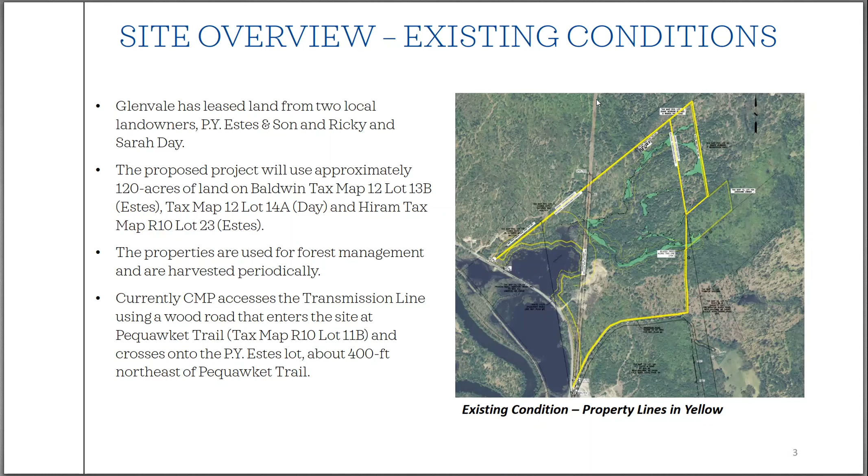As far as project size, the array will generate 21.5 megawatts direct current. That translates to about 16.2 megawatts of alternating current, the same that you would use in your power outlets at home. 51,000 solar modules will be employed to generate that electricity.

This is what they refer to as a fixed tilt array. So the panels run from east to west and they are static, they don't move. The tilt applied to those panels will be 30 degrees. The rows will be spaced about 16 feet apart.

They'll be SMA branded 4.6 megawatt inverters, 4,600 kilowatt inverters on site. At each inverter location, which we'll see in a minute, there's a storage ready capacity that can have battery backup or battery storage of power located at those spots.

As far as generation, there'll be just under 30,000 megawatt hours generated in the first year, and that's equivalent to about 4,611 homes.

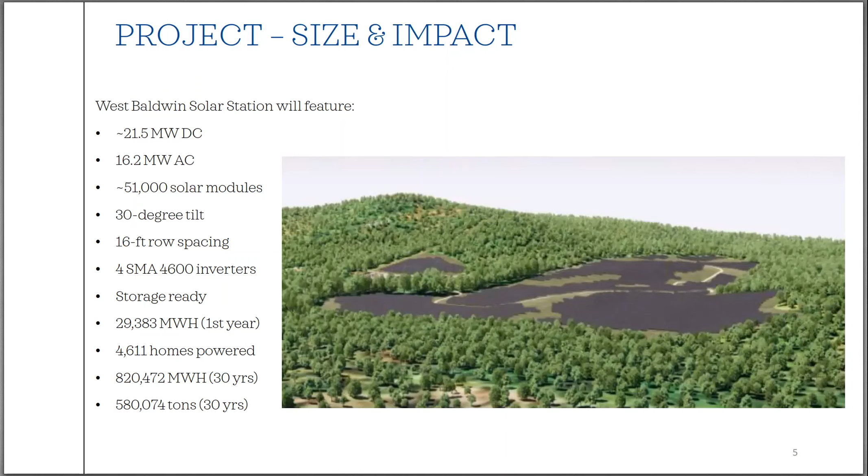So over a 30-year design life for the panels themselves, that's about 820,472 megawatt hours. And that is equivalent to 580,074 tons of carbon that will be eliminated by not burning fossil fuels to generate electricity.

Right now, Glenvale and West Baldwin Solar Station have been working with Solar Design Associates and SGC Engineering for the electrical design and the optimization of solar arrays. They've had their queue position and application in with ISO New England, and their system impact study is currently scheduled and in process.

Other considerations throughout the process were to minimize direct wetland impacts where we would be filling a wetland. There is clearing of trees in wetlands as part of this project, but direct impacts where we're either impounding a wetland or water body or impacting it and putting fill into it have been minimized quite substantially.

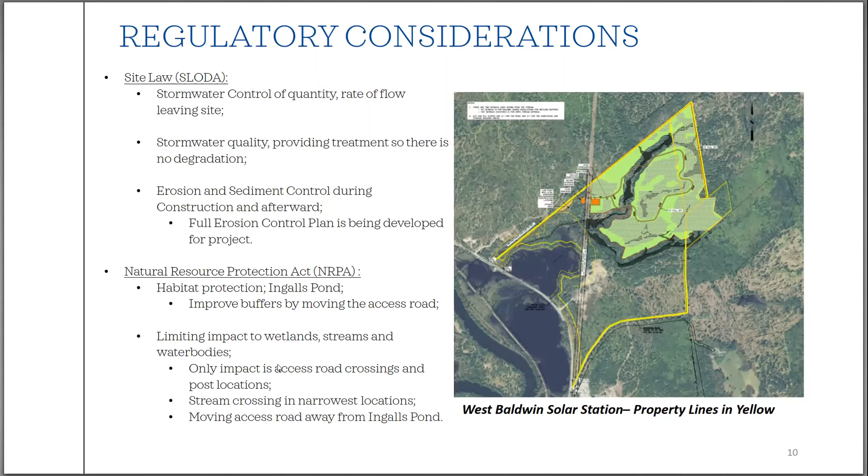This section 91 refers to the CMP transmission corridor, and this area here, which looks like it's a water body, is actually the PY Estes' gravel pit. This is the water body of Ingalls Pond, and you can see down here another little chunk of it.

So perspective one, from this location looking out over the site, you'll notice there's a fairly substantial area of trees that's going to remain between the road, the lake, and the array. Those trees do climb a fair amount up the hill, and most are fairly mature, between 60 and 70 feet tall, as we saw on the site walk.

So of the renderings, we have rendering 1, 2, 3, and 4, all looking out towards the array over Ingalls Pond. As you can see, due to the trees that are going to remain and some of the climb ahead of the array, the array won't be visible. You can kind of see in this portion of the rendering the clearing for some of that CMP easement as it runs out over the back of Ingalls Pond.

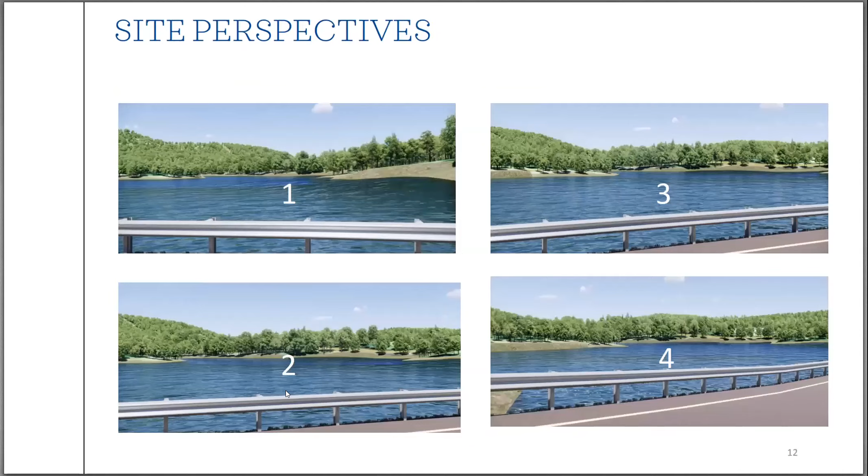So other than that, I will actually change documents if you want to get a better look at the layout and everything. But first, I think what I'd like to do is discuss the Google Street View image and that perspective vantage point, and then go through the rest and maybe take some questions.

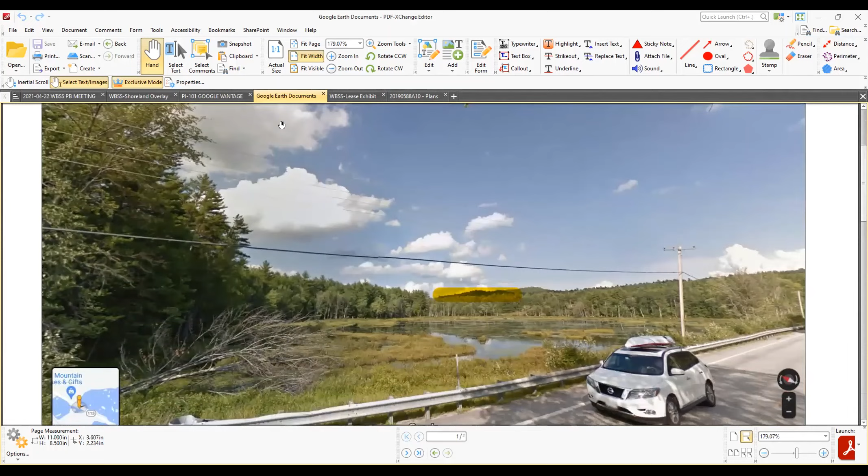So this is the image that Mr. Strzok had some questions about. This guardrail is at the end, almost on the Hiram border of the property. As you can see, this vantage is actually looking back almost east-southeast along Route 113. What Mr. Strzok had asked is if this hill was on the property and potentially one of the ones that the array was climbing up, and if so, how can we be assured -- as you can see, there's kind of a lighter run of trees in front of the darker hill in the background -- if the array was on that darker section, how do these trees down here block it?

Well, that's not the hill, because again, looking at the guardrail, which is along the road, and the power lines, you can look at this map here. I'm going to put this in full screen view so it's a little easier to see the whole thing. What you can see is the guardrail is right here that we were talking about, the end of it. And this would be the new entry into the site.

If you look back along the road -- actually I have a sneaking suspicion that street view angle is more this way -- but just saying, if you go due east looking towards that hilled area, you're not even looking at the site. To really get a good view of the site, you'd have to be over here near one of the utility poles on Route 113 and look this way. And at that point, even a tall person with an eye level of about 5'6" would have to be looking over the tops of 60, 70-foot trees that are climbing up the hill here, and you're going to be forced to look over the array, which is behind those trees, and you're not going to see it from the street.

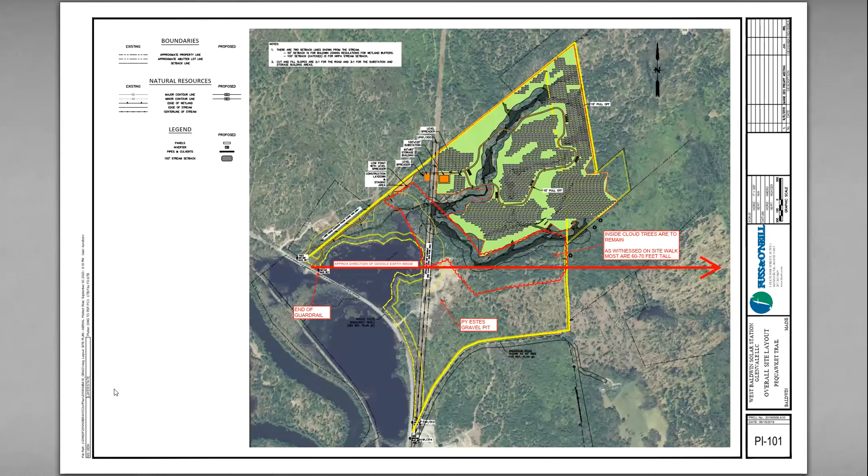So I'm pretty confident that the renderings are accurate. And I am happy that Mr. Strzok asked the question, because that street view is kind of indicating that there's a hill over there, but that's not on the property. You can kind of tell that it's on the other end of the pond and actually on another property.

So with that, I think what I'll do is stop talking and take questions. I do have the full plan set available, as well as some other maps and things, but I think it's probably best that I just take questions and get this started.

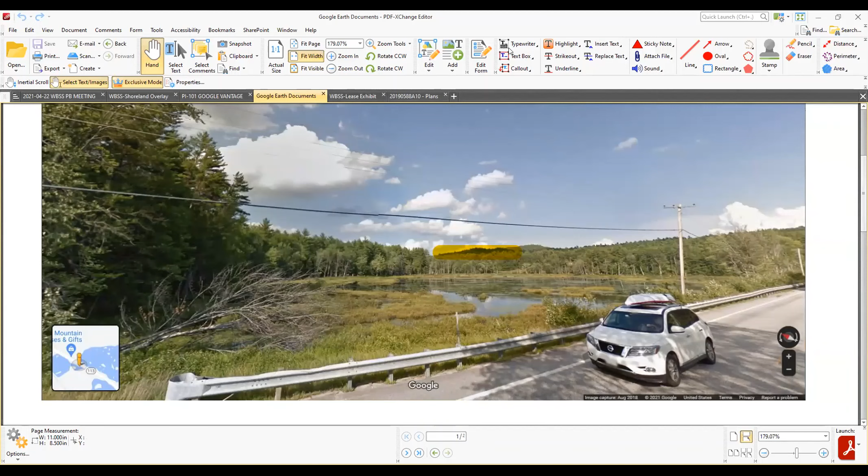Okay. All right. Thank you, Rick. Very informative.

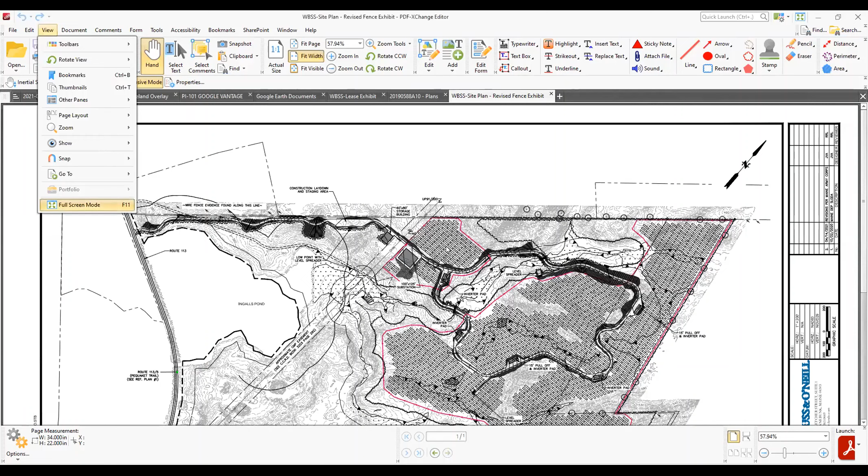No, that's fine. I'll share it and show you the map that I intended to do at the tail end of my presentation, sorry about that. So this is a little bit harder to read, folks, and I apologize - it's a black and white topographic map, but what you'll see in color, in these reddish magenta lines, is the fence perimeters.

So coming in again from Route 113, there won't be a gate until you get to the east side of the power transmission corridor. Then there'll be a perimeter fence that goes around that has a gate first to let you in. The substation will be gated as well, and then it'll circumscribe the infrastructure constructed here in this smaller area. We'll have a gate here to continue on the access road, and a gate here to continue on the access road, but that'll be a self-contained little area there.

And then the larger portion of the array will have a fence around it as well, but with a gate and yet another gate on either end of the road. There'll be some gates scattered along the back edge too for egress if someone's out there and needs help, like a workman or something.

So what you will see is that in response to Mr. Jarrett and Francis Small Heritage Trust's concerns, we left basically the entire stream buffer and then some, beyond the infrastructure of this inverter setup, turnaround, and stream crossing. We've widened out and eliminated the fence, adding a piece of fence here and here instead of going all the way around and making a giant blocked area. So now any larger woodland animals - deer, moose, and what have you - can travel back and forth along that stream corridor like they would today, relatively unimpeded.

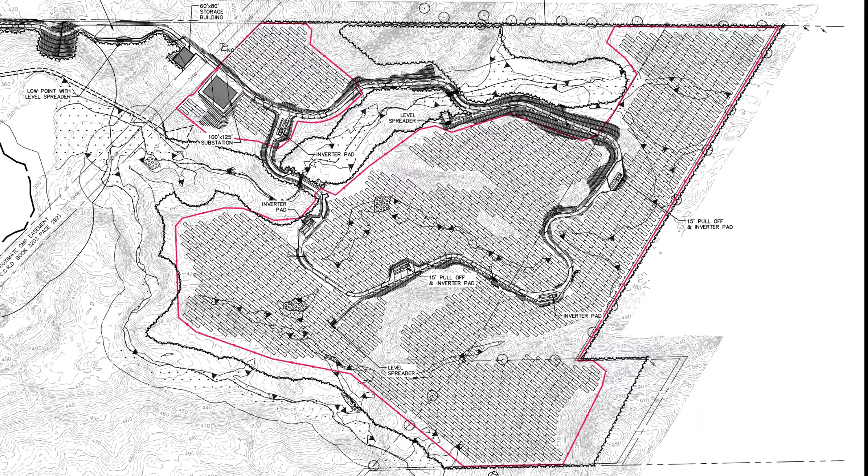Okay, we're going to follow the rule here, like I used to do in strategic planning during my career. We always said silence is concurrence. So if nobody's speaking up, we'll move on, and we'll certainly at the end of the process have the opportunity to address any other thoughts and questions when we work on the conditions for the CUP.

Good. Okay. Are there any other comments or questions or concerns from the public as part of the public hearing?

Okay, hearing none, I want to ask my mentors here, David and Joe, is it appropriate now to close the public hearing and open up the normally scheduled session of the planning board? There you go. Okay, we're getting a thumbs up.

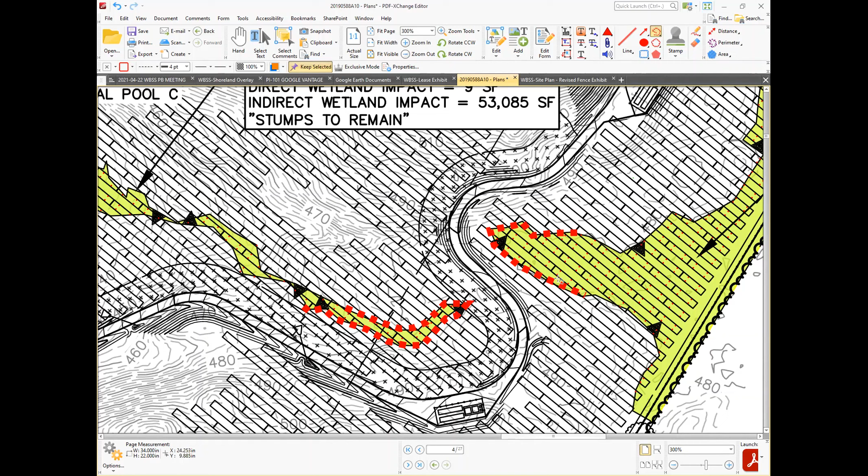And then we ran down a bank here and then around the corner, but they aren't connected. This one runs off this way, and this is actually running this way further into Hiram and eventually winds its way back.

I actually like the fact that the wetlands will be shaded. I believe that it's beneficial to keep the temperature of the water down and not cook the animals in it, which might happen if they're exposed to the sun all the time.

I'm happier with the panels in the wetlands.

Maybe our wetland scientist can confirm that or talk more on that subject, the effect. Feel free, Bill. I'll Vanna White the presentation for you, you tell me where you want me to go on the plan and I'll do it. I think you're right in the right area there, Rick.

These wetlands are not, especially in this portion of the property, there's not much that is unique about these. These are forested wetlands that in some cases, especially in these narrower wetland channels, if it hadn't been for sort of outdated logging practices, they might not be wetlands at all.

A lot of these skinnier, more linear wetland bodies that I was identifying were the result of skidder ruts that never got fixed when the loggers were on their way out of the woods. So this sort of isn't functioning as great habitat now because of the level of disturbance that is in the area of some of these things.

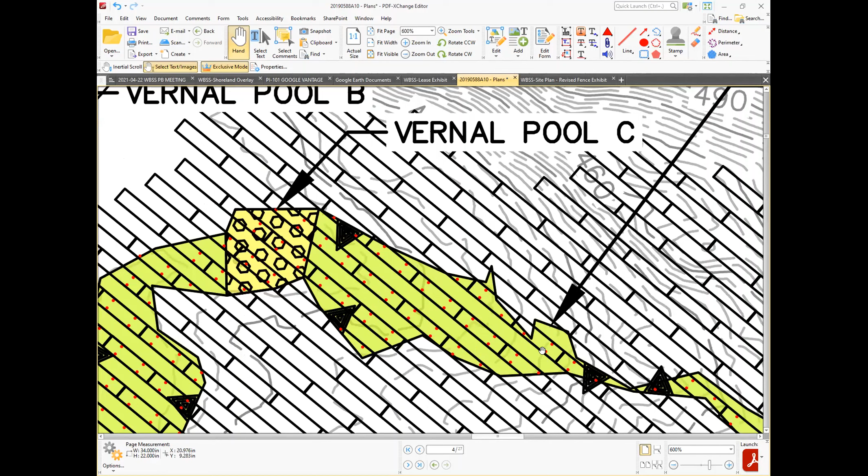Let me zoom in on this area, for instance, on this plan. You see these little red dots? Those are the posts occurring in the wetlands. So they're having us tally up all that impact and assessing the fee for those, but not the clearing. Remember, Maine is a pretty big timber state, and there's a lot of land that gets cleared all the time, either selectively or through timber harvest, not really much pulp anymore. When they're harvesting, they can sometimes clear cut right through here and the state wouldn't have a problem with that. It's really the direct impact, which we've called out in red, that traditionally gets the fee.

To muddy the water a little, the Army Corps does have the ability to get involved and assess a fee, but they use the state fee mechanism. It's very convoluted, to say the least, and frustrating. But far and away, they're generally just assessing impact fees in lieu on impacts that total more than, I believe, 15,000 square feet. So we're not even remotely close on the direct impact, even when you tally up all the little 4-inch posts.

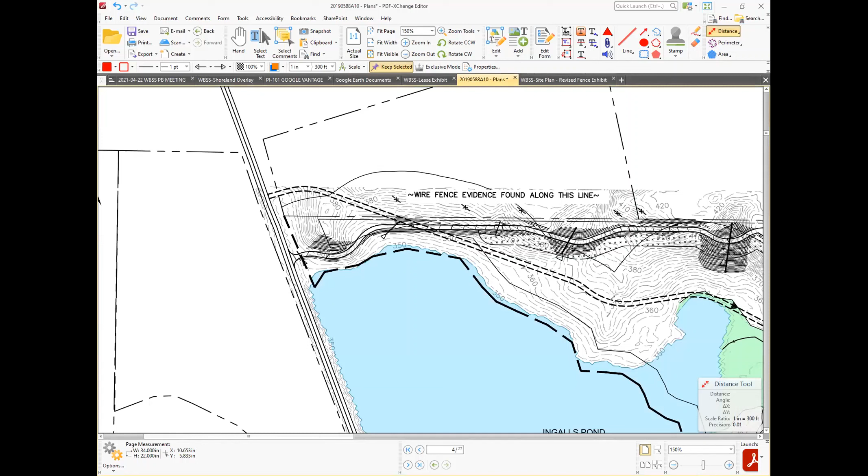So what we've got, I'm still stuck on a dimension here. Hang on. So as you go around, we have either sheeting flow if the road, it's a narrow road, 16 feet wide, so it's just going one way, pitched in a lot of cases. And in that case, that'll just be a stabilized grass embankment. That looks like it's about 6 feet of fill there.

Is each line a 1 foot contour? I think so. Yeah, and that's 6 feet of fill there. So that's quite a bit - you're moving a lot of dirt.

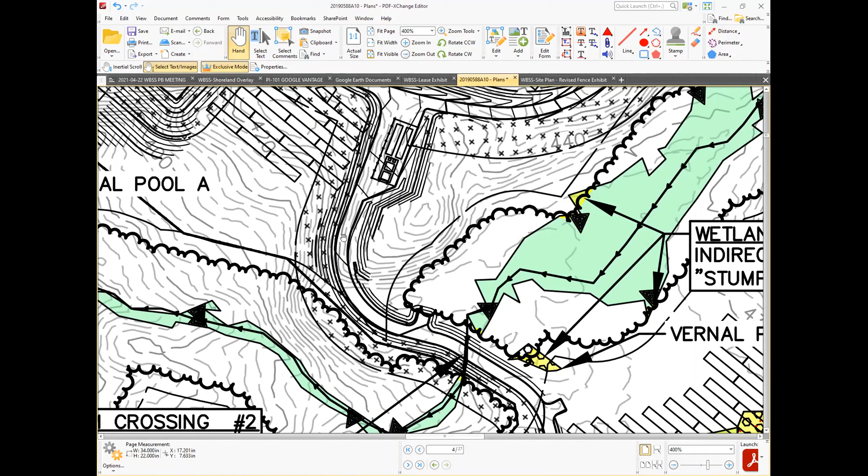And how do you keep that from getting back down into the streams? This is not the erosion control plan, but along the buffer, we are required to put a double row of either erosion control mix berm - I wouldn't foresee using a silt sock in this type of environment, but either an erosion control mix berm made from stump grindings, 2 of those parallel to one another around the resource, or 2 rows of silt fence is required by the DEP.

And there's a stormwater pollution prevention plan, the state of Maine version, which they're delegated the authority to oversee the EPA stormwater program in Maine. They call that the stormwater pollution prevention plan, or erosion and sedimentation control plan, and the folks on site are required to keep that up to date and fill out logs for the erosion control, make sure they're logging any repairs that have to be made to that perimeter, and keeping up with it and mitigating any erosion they run into.

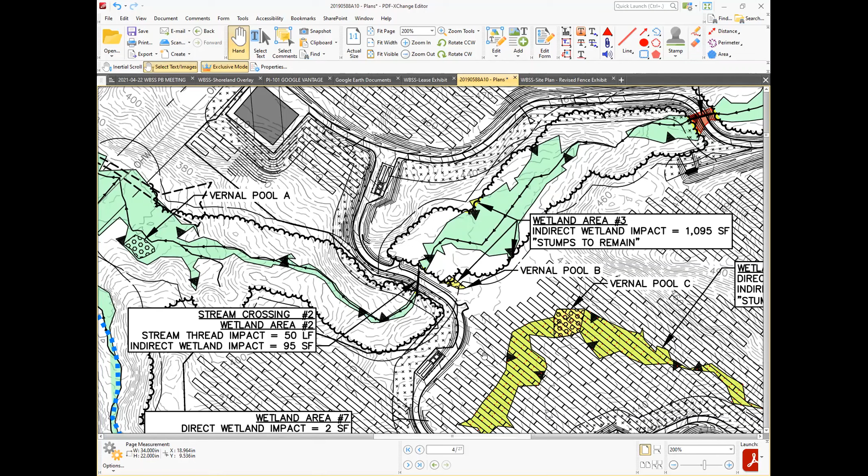You'll also see that we do have ditches. In the case of this area, it's a bit of a hill coming down towards the road, so we've put a ditch in line on the inside. Every so often there'll be either a culvert pull-off, or in this case, what they call a ditch turnout to a treatment buffer. This will go out over a level spreader, a stone lip level spreader, and out through the buffer to the wetland and be left to treat that way.

Over here on the other side of the road, you have a cut - no, on this side of the road we have a fill. And that side looks like a cut. This side's a cut, a slight cut - really just a shaving. We positioned the road so it would mostly be along the edge, but in this case, it's a bit of a cut because we were trying to hold it back from the wetland.

Yeah, I see it. So over here, what you'll notice is that we have spaced pull-out culverts every so often on the ditch, because you know how it gets, especially with any kind of hill, which this is. We didn't want a long run of a swale, so these bypass culverts that go out into the meadow underneath the panels are spaced such that I think they're only about 250 feet apart, to minimize racing water down that ditch. And again, this last one here has a ditch turnout to a level lip spreader, and then we'll have a protected meadow buffer underneath the array.

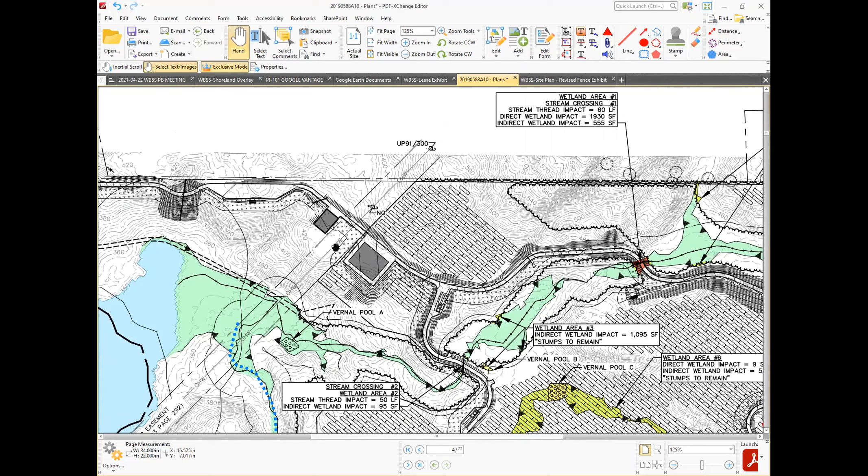Yeah, and I know I'm not looking at the soil erosion plan, but I'm just talking in general - there's a lot of earth moving here, a lot of disturbance to the site. You're changing basically the runoff characteristics from forest to meadow, thinking about increase of runoff, you know.

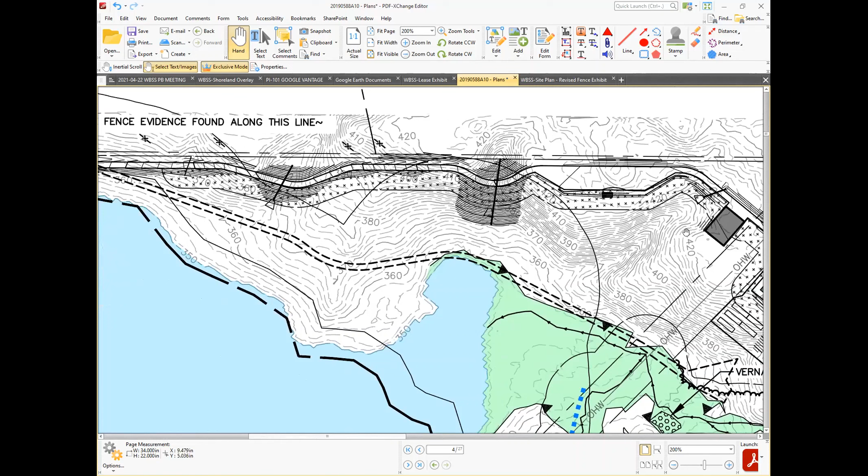Yep, no, we've run a full stormwater model, and again, what you'll notice here too is the state requires some form of stormwater treatment. You see these areas with the little cross, the plus sign hatching - those are all required to be maintained as what they refer to as a buffer, and there's a certain quantity of those that we need to provide along the impervious surface of the road in order to maintain the treatment characteristics that the state's looking for under their regulation.

Right, I was more concerned with impact to Ingalls Pond, you know, and how we're dealing with that.

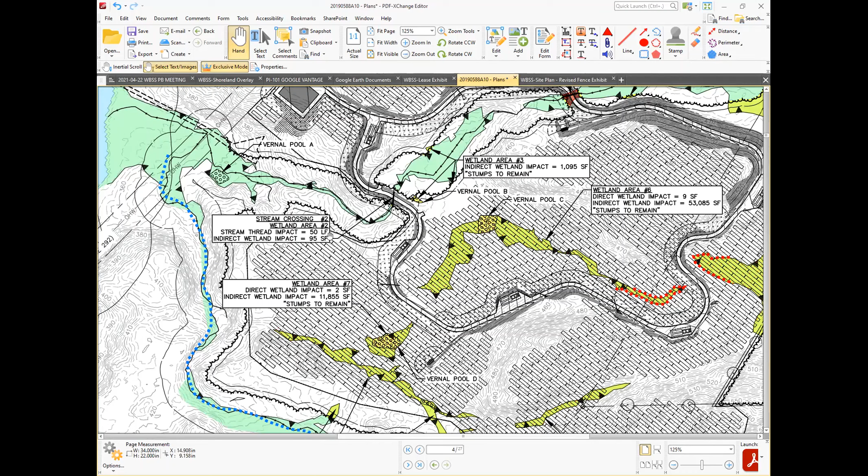The other thing to understand is that the state does have a disturbance-at-one-time threshold that you can't exceed. So as we go along and build, it's not like they're going to blow open all 100 and some odd acres at once. It comes in chunks, and you have to establish the prior piece before you move down the line.

So they may do some of the foresting all at once, but when it comes to the road construction and moving in and doing the rest, they have to proceed in a manner that's phased out and staged. On your soil erosion plan, you must have a sequence of construction outlined.

There's a set of notes in the back that the DEP requires on all projects that discusses how much can be open at once. Generally, the erosion and sedimentation control plan allows for that sequence to be modified, but they have a threshold of acres at one time. It can be modified by the contractor if what we've come up with in our plan isn't how they'd proceed, but they have to maintain the same threshold.

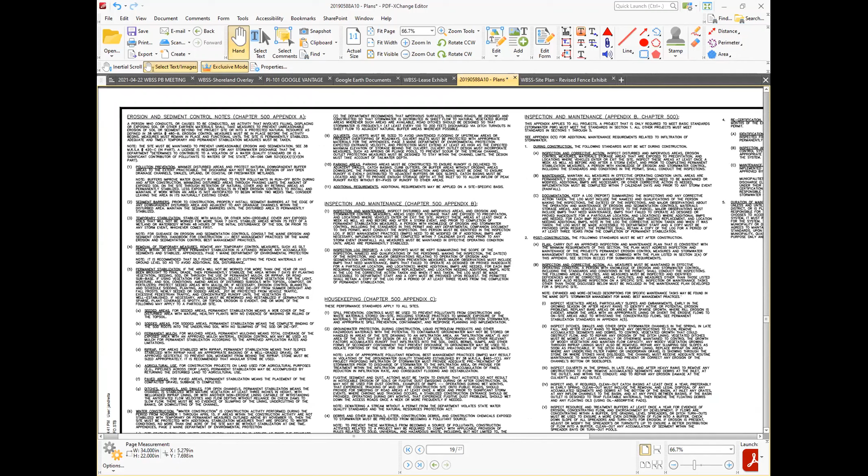I'm trying to find it. Of course, it's one of those things you can't find when you want it because the notes are so thick. Well, I'm pretty much familiar with this sheet, it's pretty much standard. So yeah, I'm glad it's there. I'm just, you know, as I said, I don't see the whole set, so I'm asking.

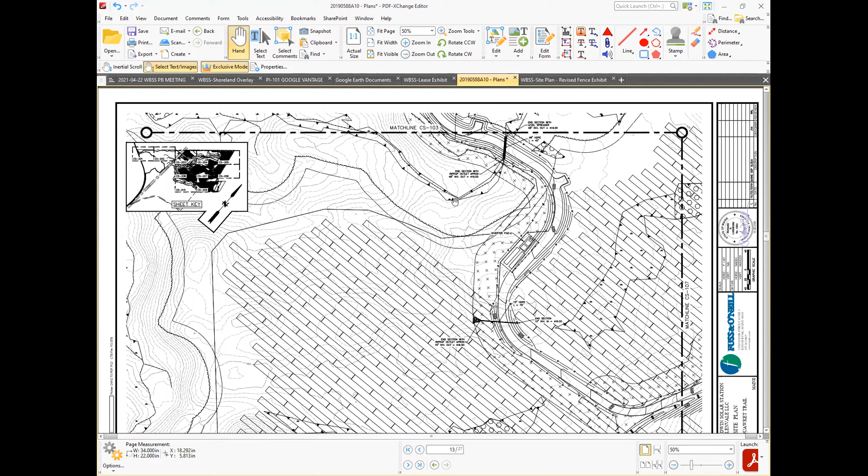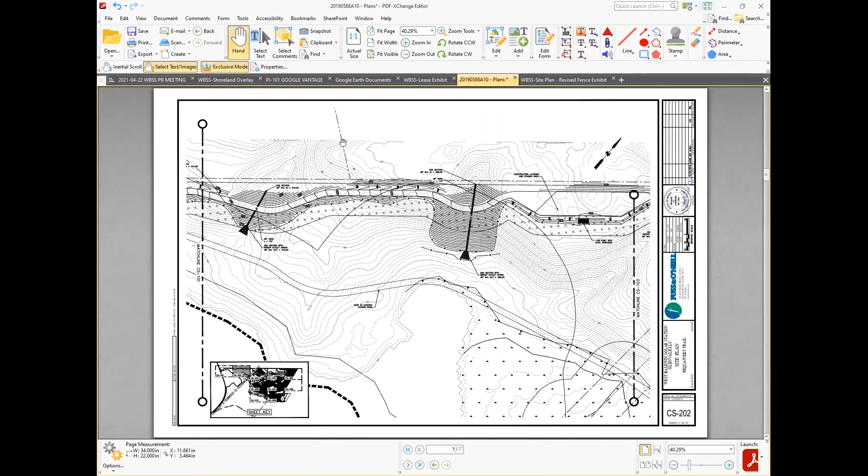So the contractor can, within the confines of the restrictions of the open area thresholds, move that around based on how they feel it would best be constructed. I understand it's confusing, but I know in New Hampshire they limit it to 5 acres, and on a project like this, where it's this big, it would be limited to 10. I'm drawing a blank on whether in Maine it's 10 acres or 5.

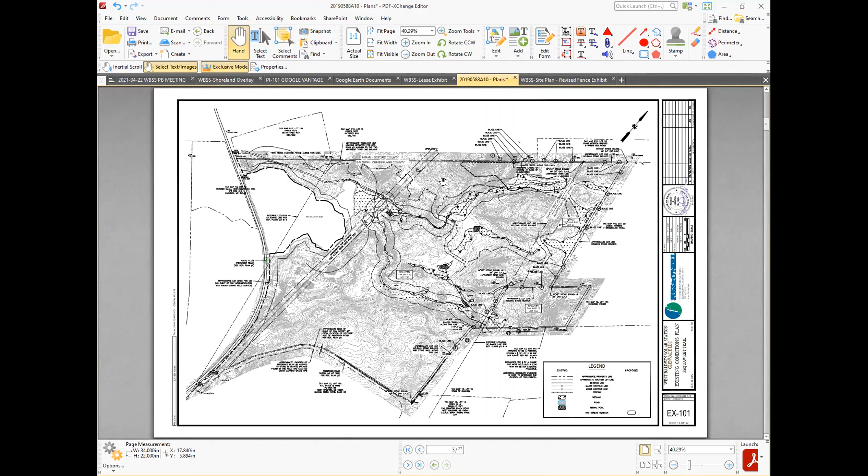So I apologize. Okay, thank you Don, that was great, great ideas. If you want to see any more detail on the soil erosion plan or sequencing plan to get more comfortable with the impact to Ingalls Pond, I know Rick and Aidan will be able to get you that detail. Do we have a set in-house I can look at? Yeah, I think so, and I can certainly send the same file share to you, Don.

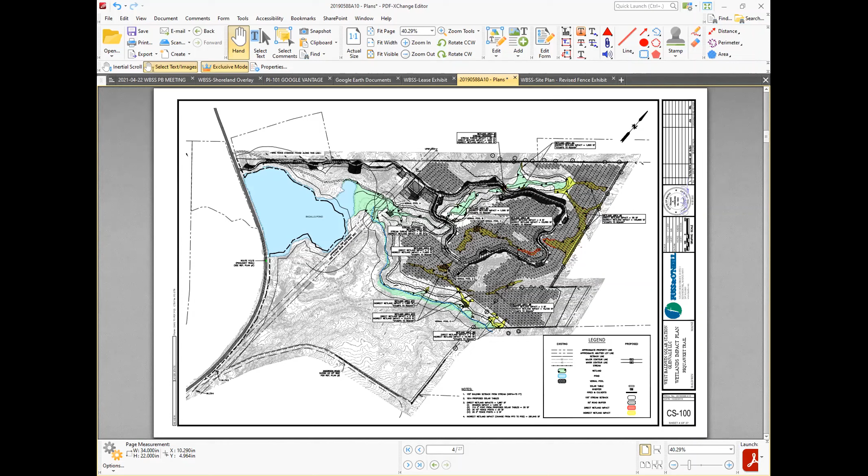That would be great. Mr. Chair? Okay, yes. Yes Aidan, go ahead. Because this is our first time to meet Mr. Sharp, I'd just like Rick to spend a moment talking about how we're moving the road away from Ingalls Pond. Given that was Mr. Sharp's concern, I think we're doing something really helpful for the pond, so if Rick could spend a minute on that, I think it would be helpful.

Absolutely. So right now, Don, this is Route 113 here, going past Ingalls Pond, the eastern portion. There's another big section over here after some island area in some spots. But the portion we have is on the east side. Today, this double dotted line is where the access road to this property is - it actually starts in Hiram. The landowner was a bit chagrined by that, but that's where it starts and comes in. As you can see, it runs pretty much right along Ingalls Pond, if not in it, depending where you're at, and gets pretty punky in spots as you walk in. As you remember from the site walk, there were a few spots where it had actually washed out - I think one might be right here, and another might have been right here.

What we recognize is that this is not acceptable to have a construction or access road for a large tract of land being forested. Even if this project wasn't being done, this would still be no good, even if they were logging it all the time - it's just way too close to the resource. So as part of the project, since this isn't even technically on the property, we're moving the entrance over here. That is in the area already being impacted by Route 113, then promptly moving it up as close to the property line as we can, continuing to climb the topography there. That will allow this road to not be traveled anymore, not be an issue, and revert back to woodland essentially. Yeah, I can see that - I like what you did there.

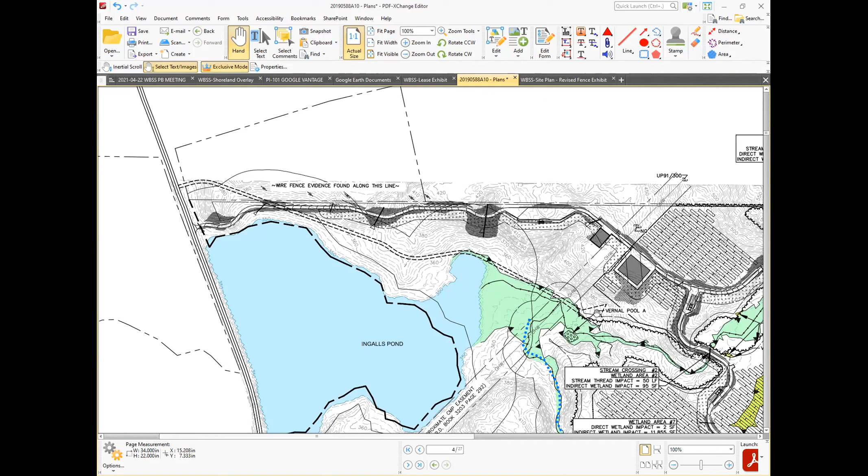You're creating a much better buffer between the roads and the pond by putting it up on the hill. Yeah, you have several hundred feet of forest that you have to filter through. It'll be a nice improvement. That will allow for some of this area to be a less disturbed habitat, and this most definitely right here. Yeah, that is an improvement, that's for sure.

Yeah, when we ran the site walk, it's a little surprising, especially as you get down and start to head towards the log landing, or what have you, on the other side of the power lines, just how close you are. You're pretty much walking right along the edge of that wetland. Right. Okay, good. Right.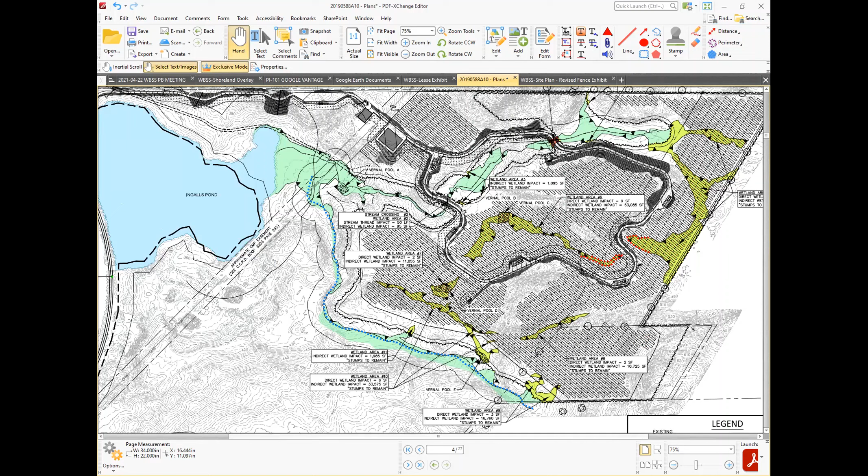So are there any other topics that board members would like to bring up? David, I thought you had your hand raised earlier. I think Wes was the next one. I think he had his hand raised earlier. Wes, take your, there you go.

And I'm sure all the sites there will be like that. I did the detail of erosion control on the Long Road project, and they even mentioned that if land is disturbed in construction, it should be seeded within a week. So they take a lot of care on it, so I feel comfortable about that. And the biggest disturbance of land is digging trenches for electrical conduit, but that's in isolated areas, and I'm sure it'll be controlled. So that's my two cents worth. Thank you.

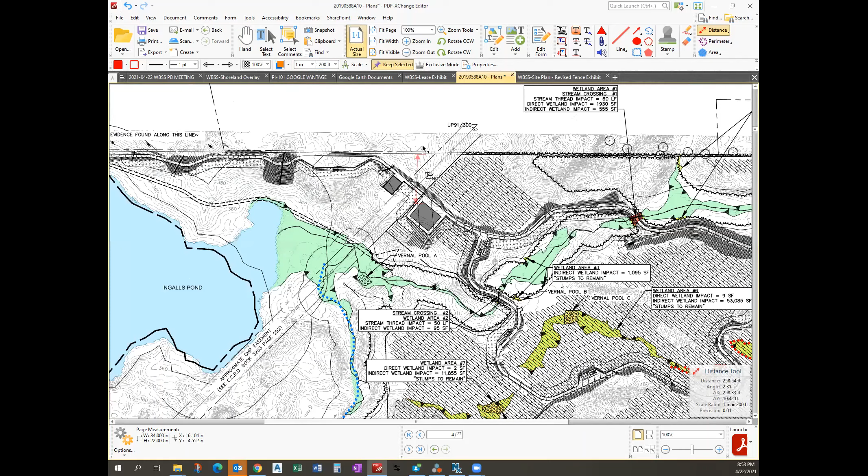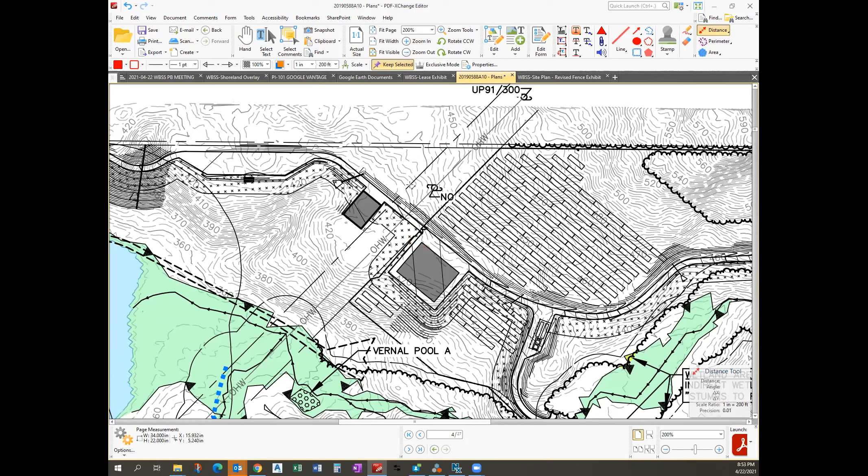I think. Yes, 200. So the substation, the nearest corner of the substation is going to be just over 270 feet to the property line. And that is, there's not really any other home or anybody over there. I think that's a large wood lot.

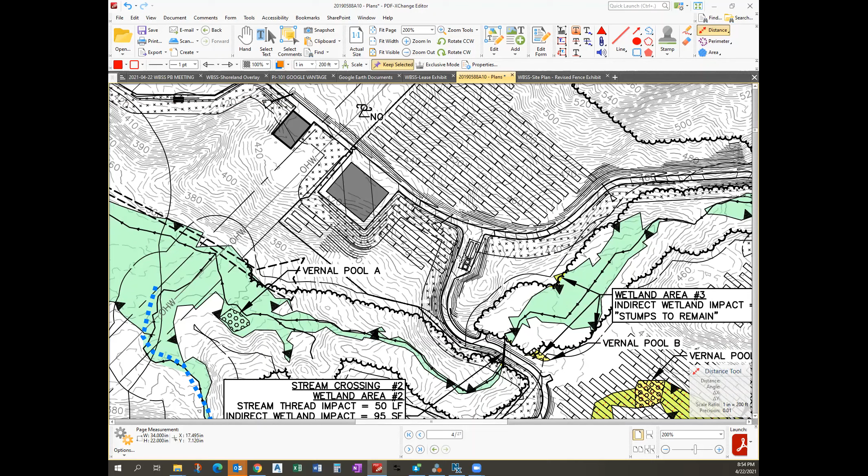And then the substation itself, that equipment doesn't actually make any noise. The pieces that do would be located on one of these inverter setups, and they make the equivalent of a refrigerator hum when they operate. And those are more inbound the property and project. Here, and here. And there's nobody around those.

It's all wooded lots as far as you can see around here. So as far as noise goes, there's not really any real impact there. I mean, if you were standing right there and it was humming, you would hear it, but it wouldn't be much louder than when your refrigerator kicks on to do a cooling cycle.

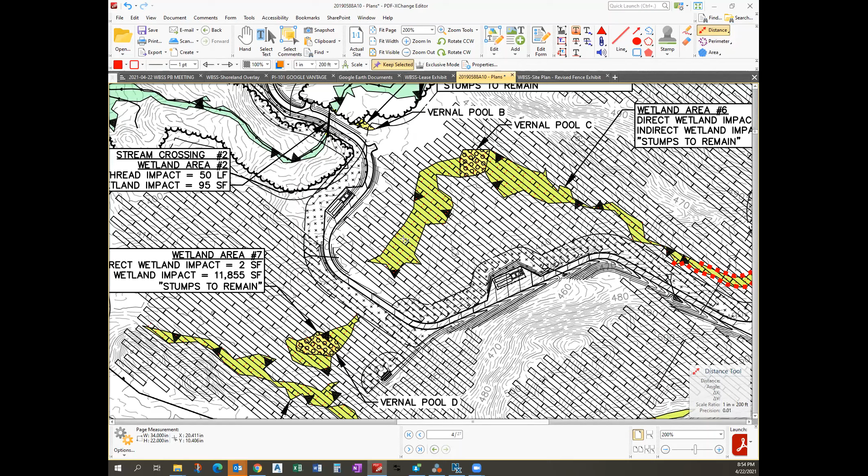As far as the bigger question, the groundwater, again, we're leaving the surface of the ground, except for the road areas, open to continue to do what they do now today when it rains. So the runoff from the panels will be clean.

There's no strange coatings or anything on the exterior of these panels. I know in the past there's been things that they would potentially treat them with, but these are all pretty standard solar panels, just like you'd have on a roof of a house for treatment. So it's not any different than that.

So there's not really a risk there of anything impacting the groundwater on this site. It's very akin to it falling through the forest that was there before the panel. It's going to hit the panel, roll off, go onto the meadow below, and then either soak in or in a really heavy rain start to run off a little bit and then soak in.

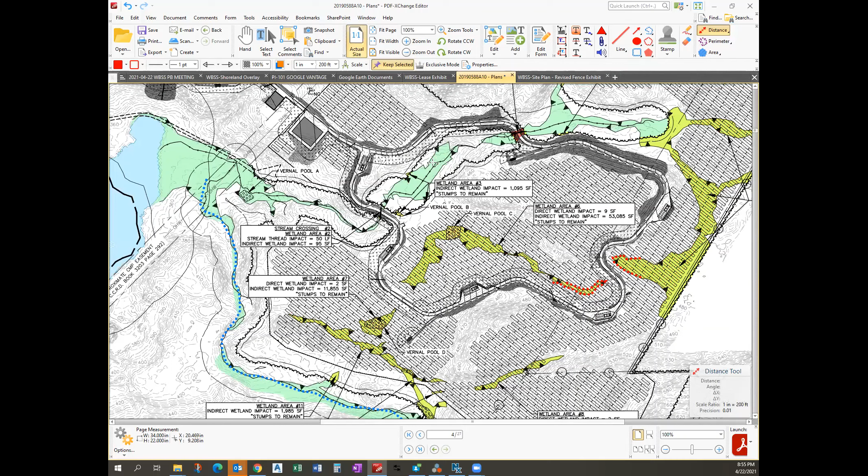As far as in the future, when this is decommissioned or a panel gets disturbed and needs to be replaced because it isn't functioning properly anymore, there are, depending on manufacturer of the panels, recycling programs in place for a few of the vendors.

And then the rest of the cases, it would be like any other kind of, unfortunately, any other kind of debris that comes from a site or a renovation at a home. It would go to the landfill that is deemed the one for the area. And most of those landfills, if not all of them now, are all lined. So there's no risk of anything leaching out of the panels inadvertently and into the groundwater.

These panels are all, I believe, inert, but there is one company that makes one that has some metals in it that can be a problem. But again, I think Long Road has supplied the studies that go with that particular line of panels, and it's shown that there's not a risk there either, because they're completely encapsulated in glass. So you really have to work hard to have anything other than trace leave those panels as far as any of the material on the inside.

Most solar panels nowadays are made from a variant of silicon, sort of like the base material of a microprocessor. It's essentially a really micro thin layer of man-made volcanic glass that's been shaved down, and that's what generates the electricity, in between the panels of glass, with copper wire or whatever in there too, but it's relatively innocuous stuff. Aside from one particular vendor that has a heavy metal in some of their panels, the other umpteen vendors are all operating under a different program.

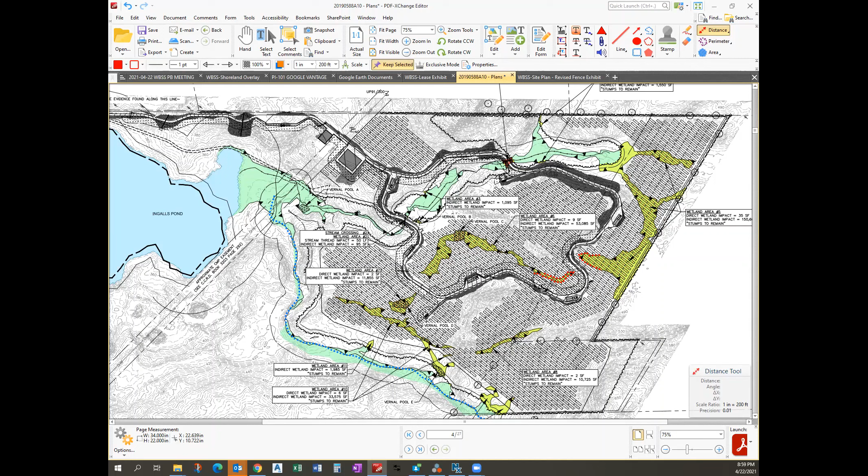The western portion, so over here. Joe? Sorry. Yes, western. Yeah, so that's the part that is over towards the CMP line and then around the Ingalls Pond.

But right now I presume it would continue to be managed as a forest, and then every once in a while they may do a selective cut on the portion that they still control outside the lease.

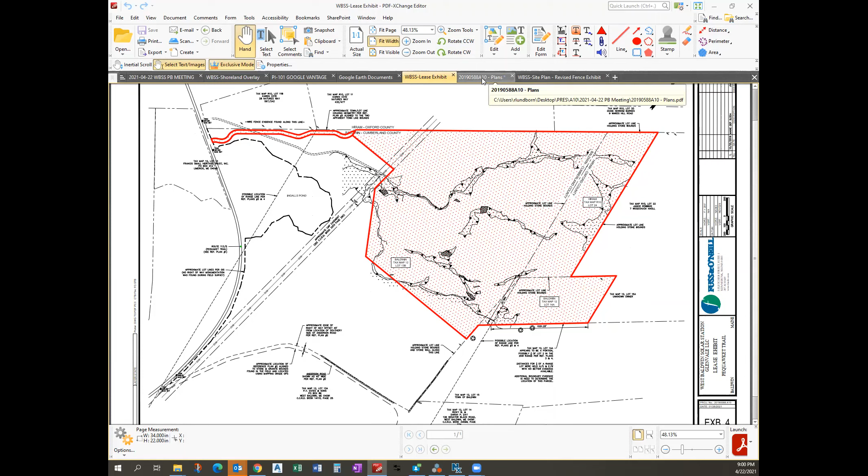I guess the reason I brought this up was my concern. We opened the meeting by looking at what the view would be from 113, and we talked about all the forest land between 113 and the project. And I think we all made this assumption that this will be forest land as long as there's a project back there.

And now I guess I'm finding out that's not a great assumption to come up with. I don't know that that's the plan. I know that, again, they haven't been clear cutting the Estes. Have the Estes clear cut in any recent history, Wes, by your recollection? They do some selective cutting now and again, but it's not enough to clear it out.

Well, you can't cut below 40 square feet basal area per acre anyway, by state law right now for a piece of land that size. They'd have to file for conversion.

I bring it up because we made an assumption when we looked at the visuals, and now I'm not sure that assumption is correct.

I can't speak to what the land outside the lease would be done with, but I know that if they were going to cut it, they'd have to get a permit at the very least through the Department of Agriculture, Conservation, and Forestry, if not through Baldwin. I don't know if Baldwin has a permitting process for forestry work of any large scale.

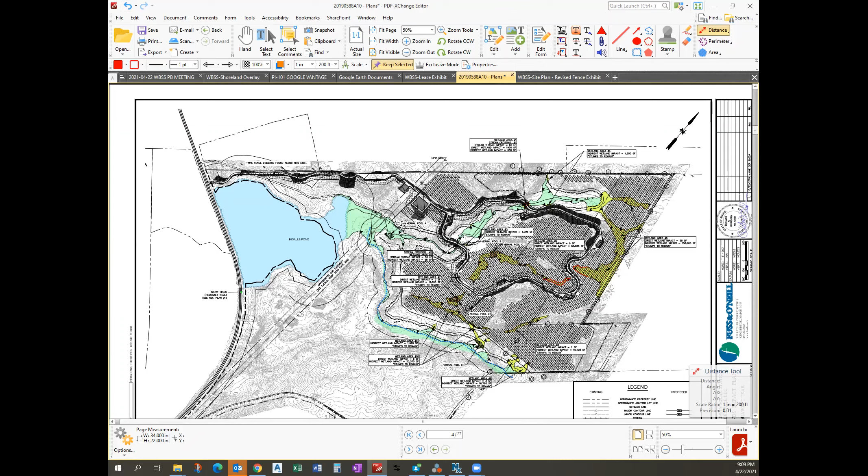With that, I think Aiden wants to say something before adjournment. I wanted to see if Rick or Aiden wanted to say anything.

Thank you, Mr. Chair. I would say on operations and maintenance, we did include operations and maintenance information in our state permit application, which is left at the municipal offices, and we included that as an exhibit to this application. I can't speak specifically to what Longroad do, but there's a customary set of procedures which involves having real-time monitoring of a project, daily check-ins of anomalies of energy generation versus expected energy generation using weather stations, preventative visits, generally quarterly for electrical and mechanical, and as needed for any ad hoc requirements, and typically twice a year for site maintenance. And then plowing as needed for safe access to the site. So there's a whole set of operations and maintenance plans that I think is customary.

On the modules, as Rick said, we're not planning to use First Solar modules. They're the only commonly used modules that have the environmental restrictions. We would rather not preclude us from using First Solar modules, because module selection can be changed late in the day prior to construction. So we'd rather retain the First Solar conditions in case it comes up in late stage construction planning. But I would say it's about a 5% chance or less that we would use First Solar modules if that choice were available to us. It's not something we would really be too sticky about.